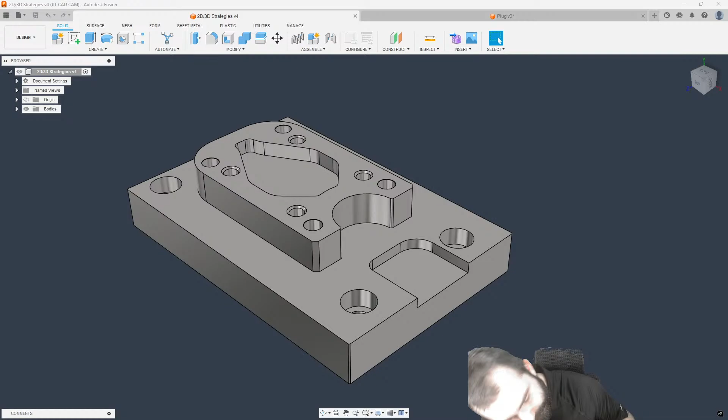So I do notice I'm getting a little loud on my microphone. I'm going to turn my microphone down here just a hair. You guys should still be able to see me quite well. There we go. I'm not so high and probably blowing out people's eardrums.

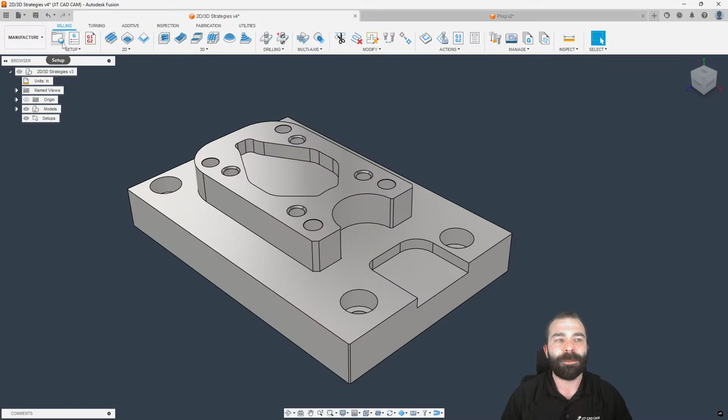But as you can see, I have my part pulled up in front of me. And as you guys all know, you've probably gotten to that point where you've made toolpaths and you've been frustrated with the results of your toolpath. Now, what I like to do for most people, when I train, is start with nothing more than a normal setup, right? I am going to set my Z and my X.

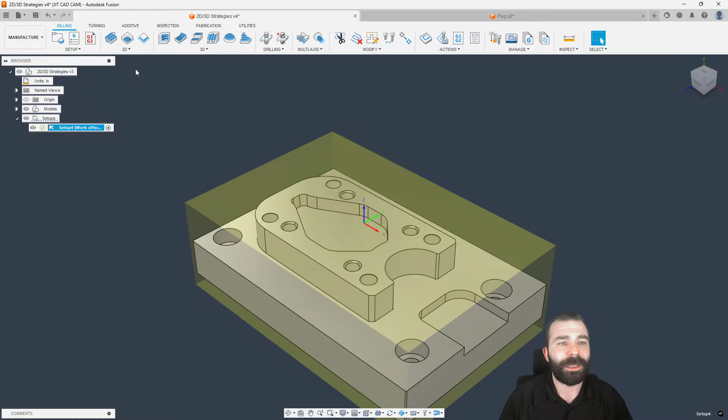Again, the idea of this video is not about setups. It's much more about how we're going to program our parts in a much more proficient way. So I'm going to say a 2-inch high stock, and you guys will understand here in a second. I'm going to dive into the toolpath area of Fusion to really kick this off. So we're going to start with a facing operation.

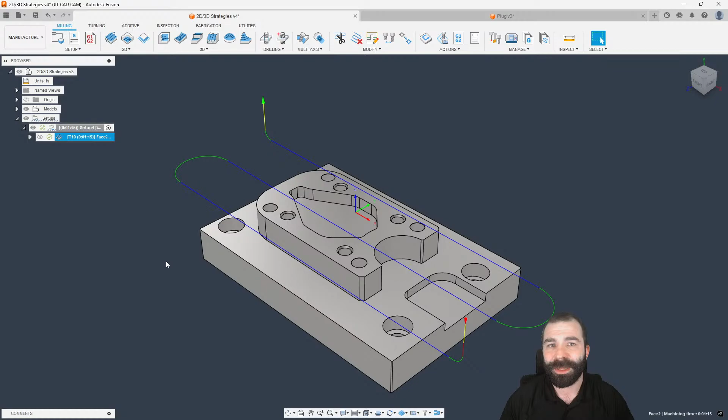But as you're seeing, the very first thing I always tell people to do is to hit the OK button. Now, what is the value of that? Well, in most cases, it's always trying to do the right thing. And as you can see, on something as simple as facing the part, it has automatically detected kind of what I wanted it to do, right?

Now, the important part of this is to be able to look at the color coding of my tool. The reason I say that is because when we look at getting a path on the part, the path itself is going to tell you how to make changes. For example, we have different colors here like blue, green, yellow, and sometimes you will have red, as you have red over here. Evaluating our 2D toolpaths, they tend to all look the same in this menu.

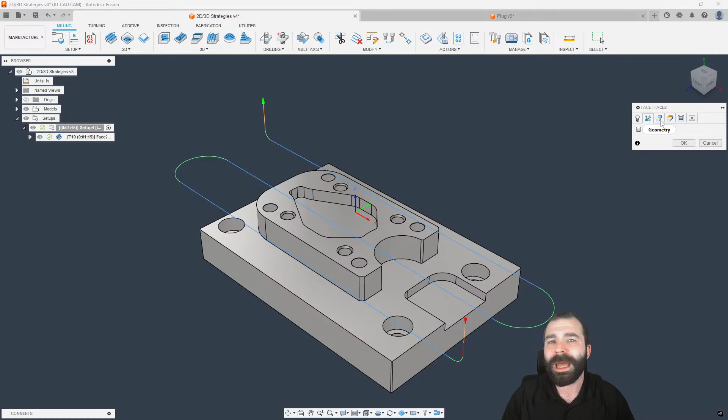We're not going to talk multi-axis, but the reason why the multi-axis tab has been moved is because in the event you were doing certain multi-axis things, it will affect menus in your other options. So it is a good workflow. But again, we're not too concerned about this. So we're going to look at the geometry tab.

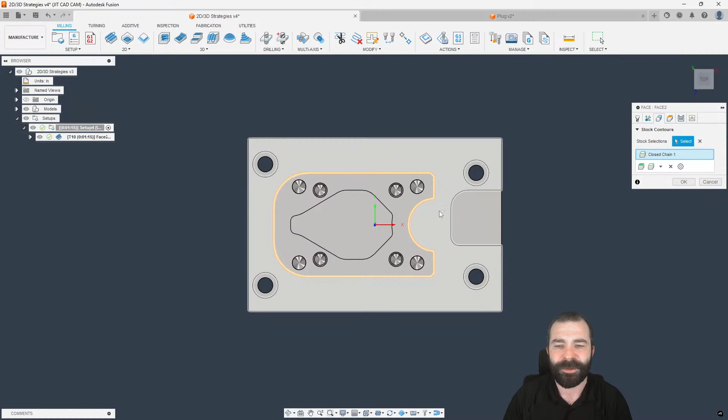Now, the geometry tab in milling is aimed at constraining a toolpath in X and Y. As you can see, that yellow boundary on my 2D has come through automatically from my setup to say I want to face off my stock. You're going to notice nothing is selected here, but if we only wanted to face the very top of this part, again, not practical, as you can see, we've now narrowed down the facing to only that area. I'm going to go ahead and hit Control Z to undo that.

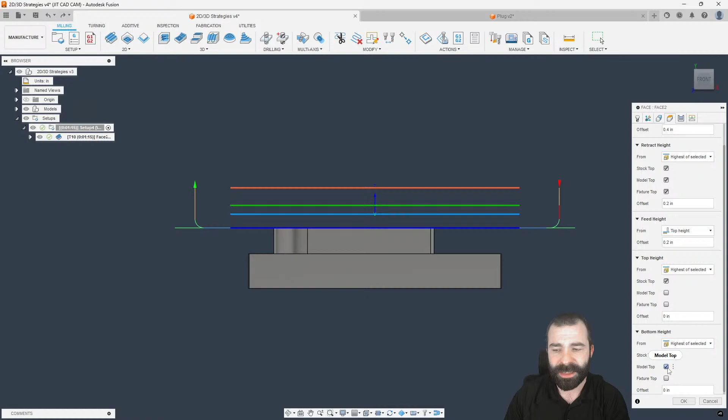Now, our heights tab is constraining our toolpath in Z. For example, we want to go from a top height of the highest, which is stock top, and we want to machine down to the highest of selected model top. Again, this is a facing toolpath.

Now I'm going to hit OK so you guys can see this. As you're seeing, we've looked at constraining or basically placing our blue lines within X, Y. Now, getting our blue lines in Z, you're noticing my blue lines aren't there, right?

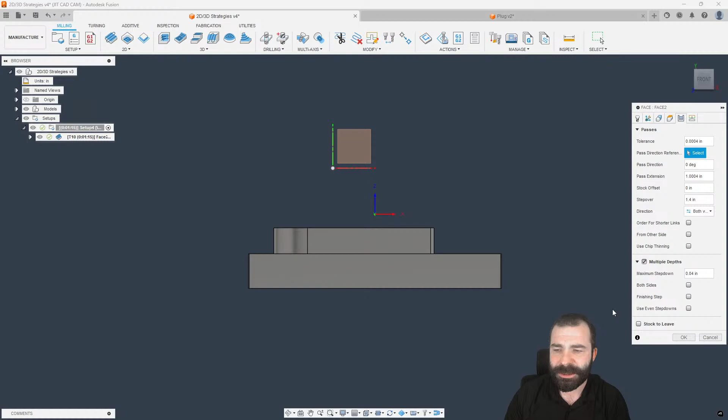That's so important because in this menu for passes is where we're seeing the color of blue for our passes. So I'm going to turn on multiple depths, and as you guys are going to see, the whole idea is now we can see our blue lines

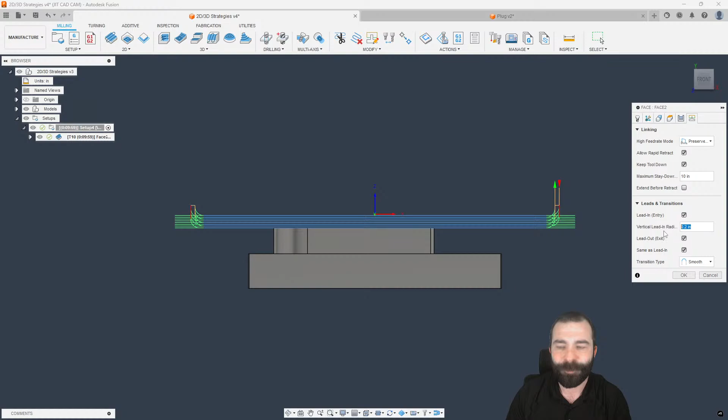constrained in Z by turning on multiple depths. So lastly, I'm going to show you guys the fact that anything else is going to be red, yellow, and green, which is our linking tab. For example, you can see how our toolpath retracts up, comes back down, or we didn't want to do a vertical lead in.

Again, that's the green vertical arc that we're seeing. So by zeroing that out, we now have no lead in, lead out vertical. We still have a horizontal lead in, lead out, of course, with arcs. But this is a very fundamental thing when you start to look at any of the 2D toolpaths, right?

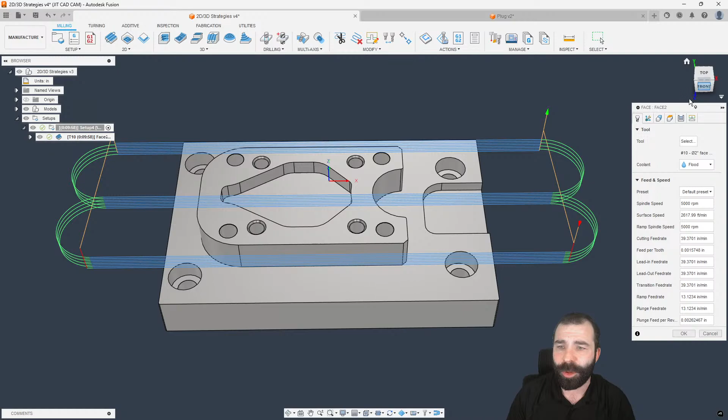So if I was to go back, let's say for example I actually wanted my blue lines to start above my stock top, I can add in an offset, and we're going to be outrageous with this by 1 inch. But as you can see, everything is going to jump up 1 inch. Now this is going to cause problems because of the way my filtering and all of these properties are set up.

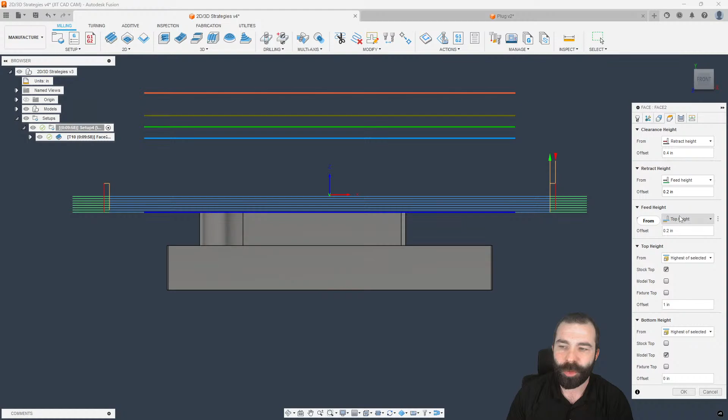So you can see top height is 1 inch above, which is our stock plus 1 inch. I'm going to go ahead and change the retract feed height. And now you can see everything kind of rolls up, or in this case, as I'm showing downwards, but now it has moved 1 inch above. Again, the heights tab is where we're trying to set where we want blue lines.

Now, a better example of controlling in a Z or an XY fashion would be if we switched our concept over to a 2D contour. Now, if I was to pick an edge here for contour, and if I was to turn on multiple depths, what we're going to see is, one, this tool is way too big.

So let's go back and restart this whole procedure, so I can give you guys a more real world scenario as you should do it. So 2D contour, I hit OK. What it's telling me is we don't have contours selected.

Again, we're going to have an empty path because there's no contours selected. So if I click back in, it's now telling me I need to pick edges for chaining. Now this tool is too large for this cavity, so again we're going to get a no passes link error. So let's pick a different tool.

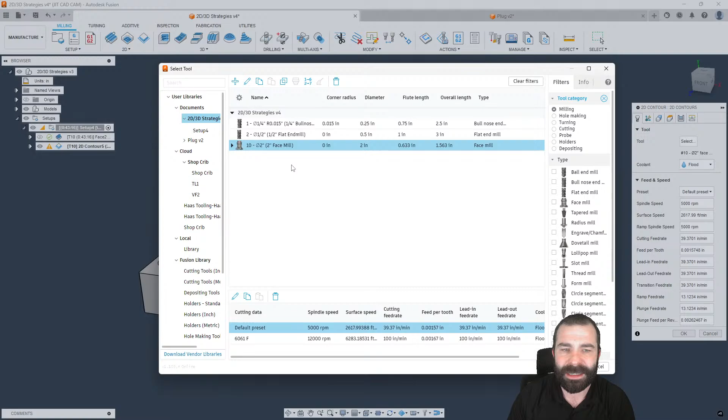Again, all we're shooting for is to get a path on that part and be able to start working with what we need. So as you guys can see, as we now have a path on that part, we're coming in and around and back out.

So the very first few things I may want to do is I don't want those blue lines to start based on that exact profile that we selected. So again, thinking about the way we're constraining in geometry XY, this is where I can edit the chain selection and add in an extension.

Now I'm just going to go 0.250. As you can see, we now get these dashed lines. Again, if I go ahead and hit OK, just like that, we've changed the constraining of the blue line, right?

Good thing to remember here is it's not how many blue lines we're working with. It's not in our Z, it's strictly in our XY, right? We want to add more blue lines in our profile, we could simply go to passes, which is where our blue lines reside.

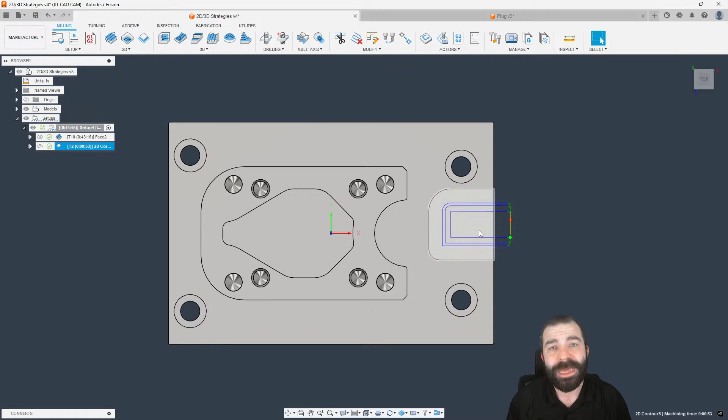And maybe I want to turn on roughing passes. Let's just say we're going to add 2 of them at 0.100 step over. And now you're seeing, again, we're adding more passes within the constraining of our XY, right?

But let's look at this another way. So if we want to constrain in Z, what I'm going to do is go ahead and do a section analysis real quick here. I think this will make it a little easier to see this now in Z.

And what I'm going to do is I'm going to go back to that 2D contour. And by default, what I'm going to do is I am going to turn on multiple depths. Again, very little things make big changes inside of this software. So as you can see, we're now doing multiple depths. I'm going to go back in and edit how many blue lines, so we get a little better scenario here.

So what I'm going to do is I'm going to decrease my step down. Let's say I only want to do 1/4 inch step downs. And a little precursor is we're working from stock top to our selected edge, right? So as you're seeing, we're making a lot of step downs in here, which is way more than we need for this. But again, the idea is we want to constrain our lines either in an XY plane or a Z.

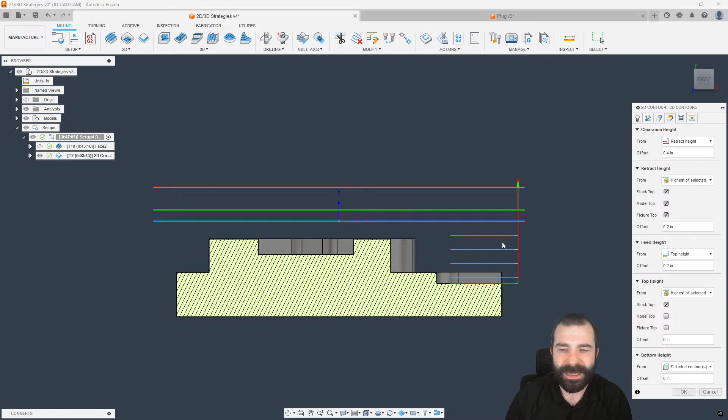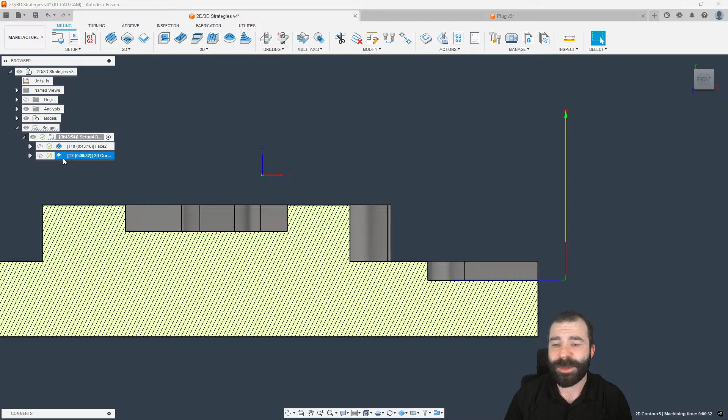So again, as I'm going to go into my 2D contour, I go to my heights tab. Again, my heights tab controls my Z containment. And if I was to go down and actually say, you know what, my top height is going to be a selection, and that selection is going to be this top flat. And if I hit OK, regardless of my step down, remember, we have a 1/4 inch step down, and the distance that this actual pocket is less than that 1/4 inch that we typed in. Naturally, what we're seeing is only one step down to be calculated, and we've constrained that down in Z.

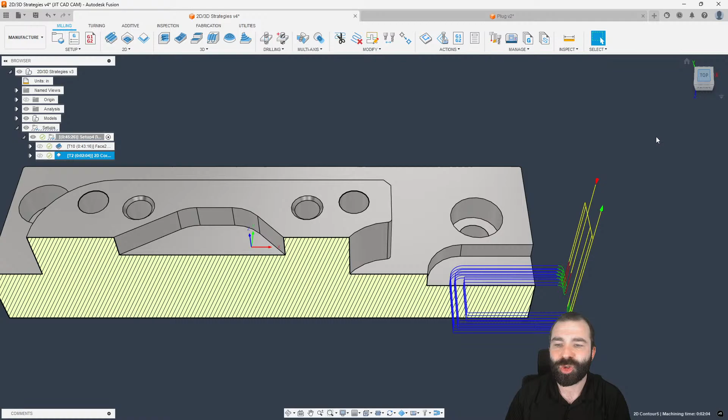Again, one final thing is maybe we want to take that and make that maximum step down 0.05. Now Fusion is going to automatically do that math. We've constrained our Z to keep those blue lines from a height or a top to a bottom. We've also constrained our blue lines in an XY fashion if I turn off my analyze over here. And then I've controlled how many blue lines that I've actually wanted to have or how I wanted to achieve said blue line, right?

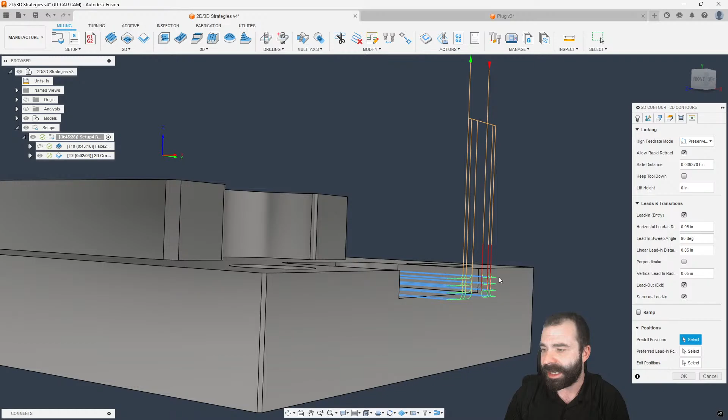So last and final thing, if we wanted to do some things with linking, again, we could see here is we're coming out of our part. We are still doing vertical lead in and lead out. So let me get this away from my big old bald spot on my head so you guys can see.

But again, we can change our linking. We could also say, well, I'm looking at the green, yellow, orange, red lines. I would like that tool to stay down in between passes. So we can go ahead and turn that on. And again, we still have that vertical lead out, and then we stay down and we come over. We're not retracting up and down. So again, based on the way Fusion was kind of built in the color coding system, you can get information from your toolpath once you have that toolpath.

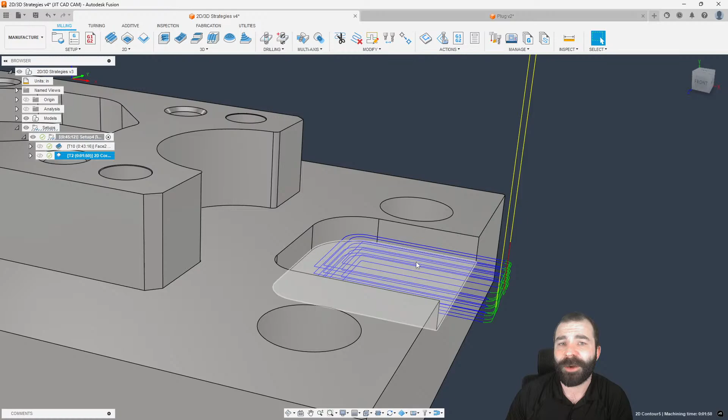But let's go ahead and shift gears now and switch off of our 2D paths into our 3D toolpaths, right? So here I have this lovely little male kind of mold or vacuum form part. And with that being said, I need to go in and create some toolpaths. So as we're going to switch over to manufacture, I do have some toolpaths already here, and I'm going to go ahead and remove those. But let's say, for example, I'm starting to get into my 3D paths on this part, right?

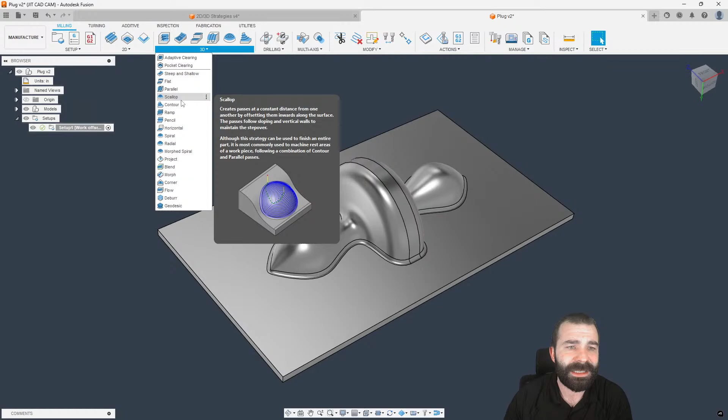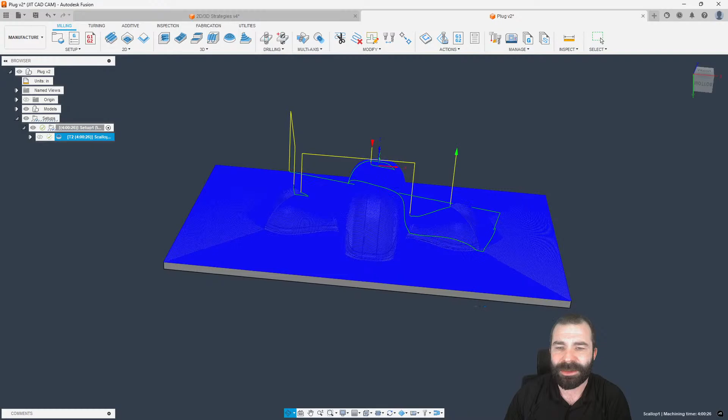So what I'm going to do is I'm going to go for my 3D toolpaths. I'm going to go ahead and say, let's do something like a scallop toolpath. Again, I always like to hit that OK. Guys, get very familiar with hitting OK so that you can get a toolpath on the part. And as you're all seeing, I'm being prompted to give this a tool. And as you're going to see, this is now going to go out and actually calculate a toolpath basically on the whole, right? So the same rules still apply in the world of, might be a little hard for you guys to see, but there is a toolpath everywhere.

But if I wanted to start with the basics of one, I can't really see this tool. Really hard. I want to change the number of blue lines that I have here. It's still the same theory, right? So I go to my blue lines, which is my passes. Maybe we're actually going to do this in like 50 thou step overs.

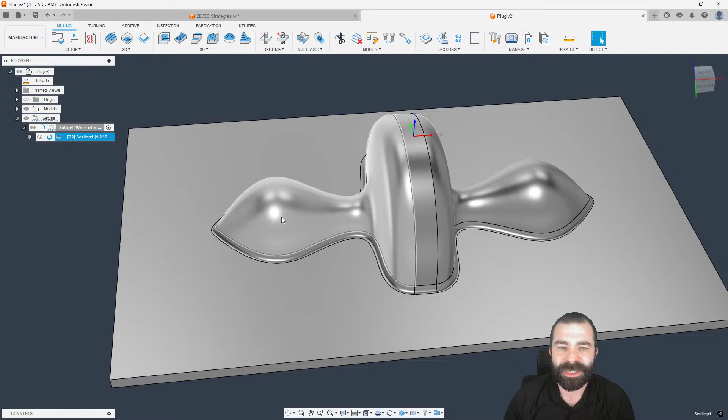Again, I'm going to hit enter here just to speed up our workflow a little bit. Now we can see a much better toolpath on our part. It probably looks a little crazy on your end with the streaming, but it's all still the same. I now only want that toolpath to work anywhere that isn't flat.

So in my XY, again, we go to our geometry tab. Some of these toolpaths are going to have some neat features. Scallop does not have one in this case. There is the ability to say ignore flat areas, but that's in some of the more advanced toolpaths. So in this case, I always use the mentality of working from left to right, top to bottom.

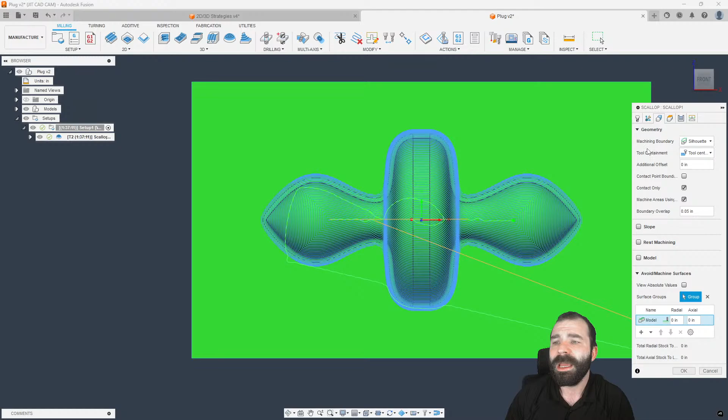As you can see, we picked our tool, moved over to the right in this case. I want to select a boundary, and with that boundary, I want the tool to work from that boundary inwards. There will be times you work between boundaries, but the idea is still the same. We're going to start with just one boundary, and as you can see, I've now contained that toolpath in XY.

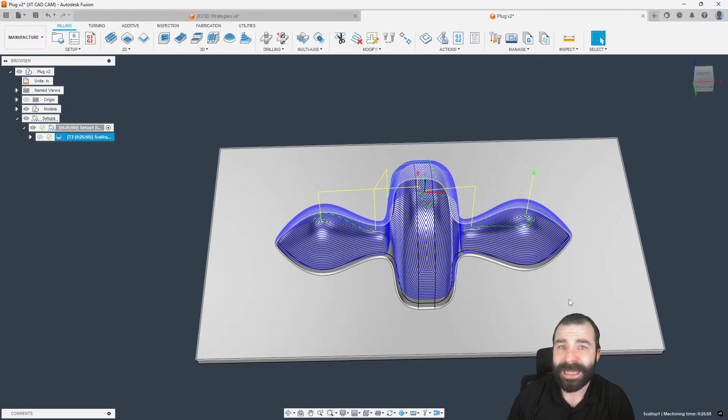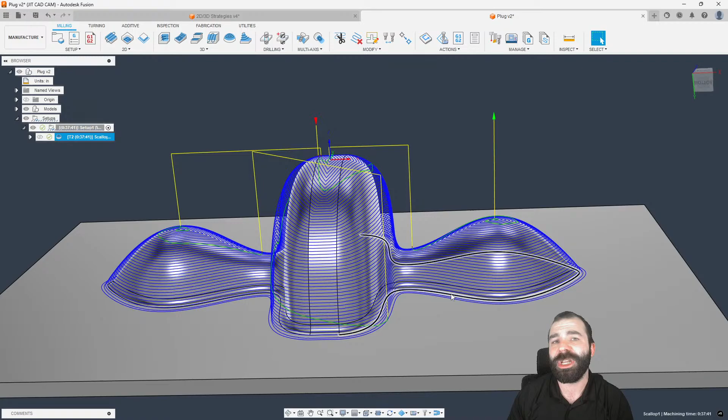It's not fully contained because we're not machining all the way down, we're actually sitting high on this part. That would still be an XY containment where I need to go in and do something like contact point boundary, possibly adjust my overlap, adding more as needed to get that toolpath constrained. I'm not adding blue lines right now, I'm just changing where the boundary sits for those blue lines.

Now, if I wanted to set between two boundaries, same rules apply. I have my first boundary, I have my second boundary. We're looking at everything being controlled in an XY kind of fashion. Because we're staying between those boundaries, we now are doing our flat area, not our actual part.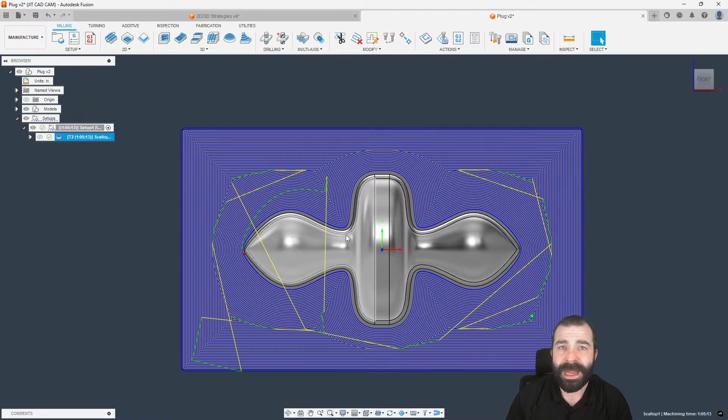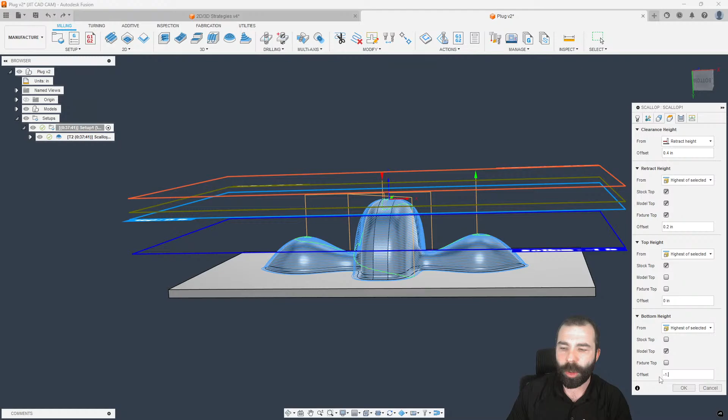Now I'm going to undo this real quick so we go back to this original part. Same rules apply - if we want to filter in Z, maybe go from a selected height, or let's go highest of selected, model top. Now I know my tool is going to stick out 1.25 inches, but I only want to machine down 1 inch. We can filter toolpaths as you see with just our Z axis.

Or in this case, maybe we actually want to go from model top as our top height minus 1 inch, to model bottom. We'll go to lowest, model bottom, and 0 again. Now you're going to notice we're doing just the lower section of that actual part profile.

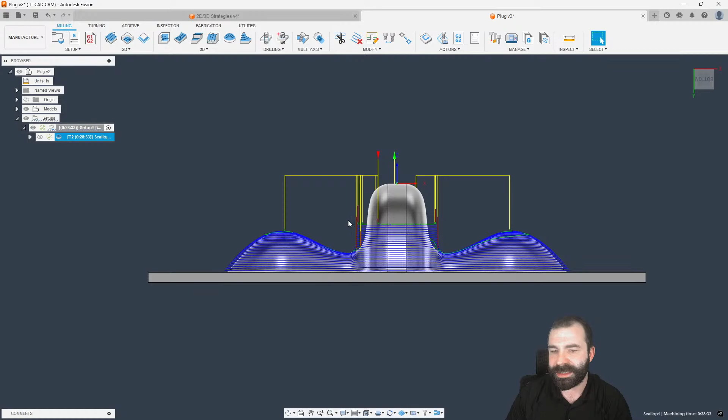So all of this stuff is controllable once you get an actual toolpath on your part. This is why I think it's so valuable at the end of the day to get a path on your part - it might not be the right path, but just getting that path will tell you the information to go back and make changes, so you can make much better toolpaths in the long run, lower your cycle time, and keep things like scrapping and your parts being blemished or having deflection.

Hey Michael, I see you out there, appreciate you jumping in chat for me. Guys, I've been a little under the weather, I hope everything's sounding all right.